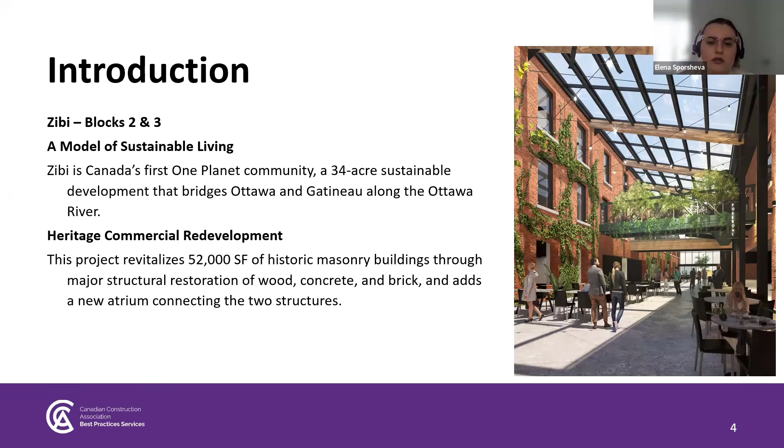Thank you, Jörgen. Thank you so much. Good afternoon, everyone. My name is Elena Sporsheva. I'm a team lead at Ledcor's Virtual Design Construction Division. Today, I'm excited to walk you through our BIM journey on Zibi Blocks 2 and 3, an award-winning adaptive reuse project that blends heritage with innovation.

Zibi is Canada's first one-planet community, spanning 34 acres across Ottawa and Gatineau. Our focus was on revitalizing 52,000 square feet of historic masonry buildings, preserving their character while integrating modern systems. We used VDC from 2018 to 2021 with a modest BIM budget of $15,000. Please note that the BIM budget does not include the cost of laser scanning or the FARO Scene license, as these resources are shared across multiple projects. Our tools include FARO Scene, Revit, 3ds Max, and Sketchfab, supported by our internal Ledcor virtual construction team.

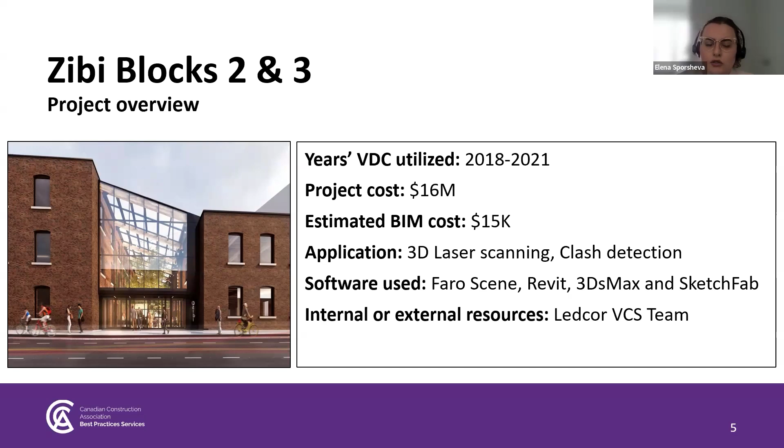Nowadays, there's a wide range of scanning technologies available, from compact handheld devices like an iPhone Pro, which can generate point clouds instantly through apps, though with limited accuracy, to high-precision professional scanners like the FARO system that we use—pictured on the left. Back in 2018, such variety didn't exist, so having these options today is a major advantage.

When we go on site, we strategically place the FARO scanner throughout the space to capture data. Like still photography, the FARO scanner records the exact conditions of a building, producing a highly accurate 3D representation. This process typically takes from a couple of hours to a few days, depending on the complexity and size of the site. This results in a point cloud, a digital 3D cloud of dots, where each dot represents a precise point in space. Together, these dots form a digital copy of the real-world environment.

We use FARO Scene software to process the raw scans. This involves cleaning up the data, registering the scans, and validating them. Registration can also take a couple of days to ensure that all scans are aligned correctly. While devices like iPhones can produce point clouds instantly, they lack the precision required for many professional applications. The choice of scanner depends on the accuracy requirements and scope of the project. Once the scan is polished, it becomes our precise starting point, replacing outdated drawings or assumptions and enabling confident decision-making based on real-world conditions. The end product scan is shown on the right.

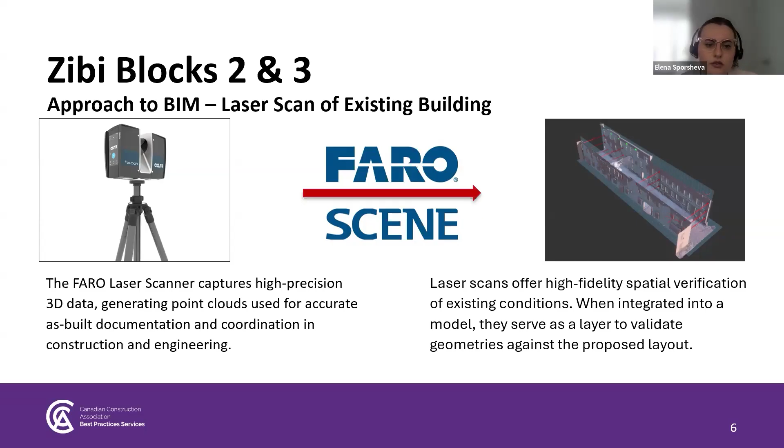Next, we either build or receive a 3D model, for example from our consultants. This model represents what's planned or designed. Now we combine the point cloud and the 3D model. In our case, we used 3ds Max, but you could use any other modeling software. This step allows us to validate whether the real world matches the design. Next, please.

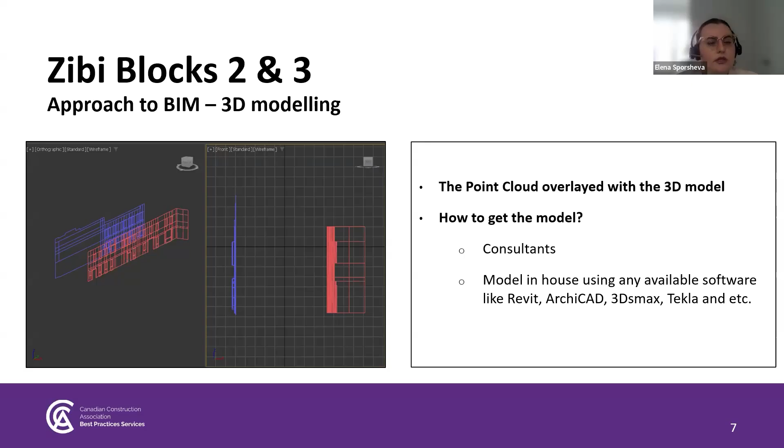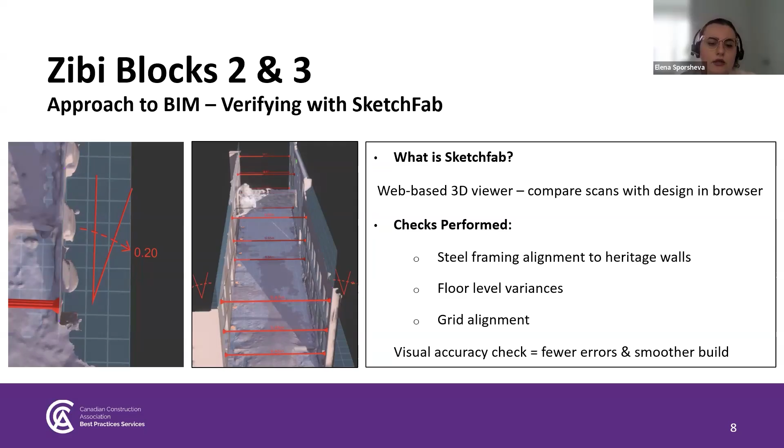Finally, we upload the combined models to Sketchfab, an online 3D viewer that lets us share and interact with complex models directly in a web browser. This process allowed us to verify steel framing alignment with the existing heritage walls, floor level differences across the building, and structural grid shifts or misalignments before construction began. Using Sketchfab gave the team an accessible visual way to validate accuracy, identify risks early, and communicate findings with all stakeholders.

Point cloud usually shows up in the colors of real-world objects or in just black and white, depending on the scanner settings and capabilities. To make things clearer, we applied color coding in our models. Scanned facades appeared in pink, while modeled steel beams and columns were highlighted in yellow and gray. This straightforward method helped everyone from engineers to project managers quickly distinguish existing elements from new ones, streamlining project coordination.

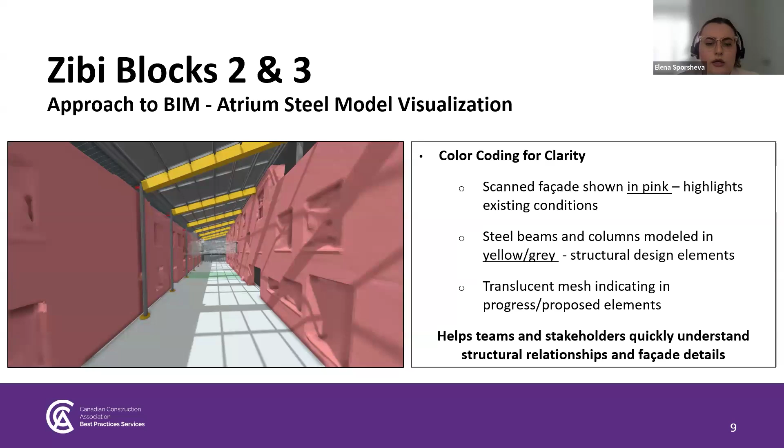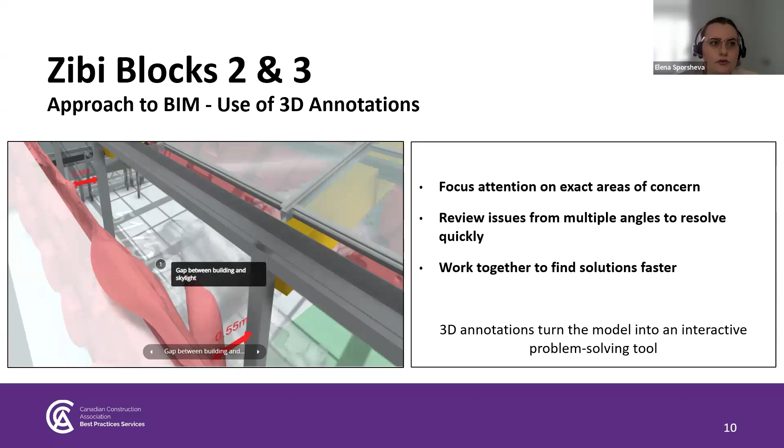Instead of marking up flat drawings, we placed comments directly onto the 3D model. This enabled team members to focus on specific areas, review details from multiple angles, and collaboratively resolve issues in context, dramatically improving problem-solving speed. For example, in this case, the comment was to draw attention to the gap between the building and a skylight that varied in different areas from 50 to 60 centimeters.

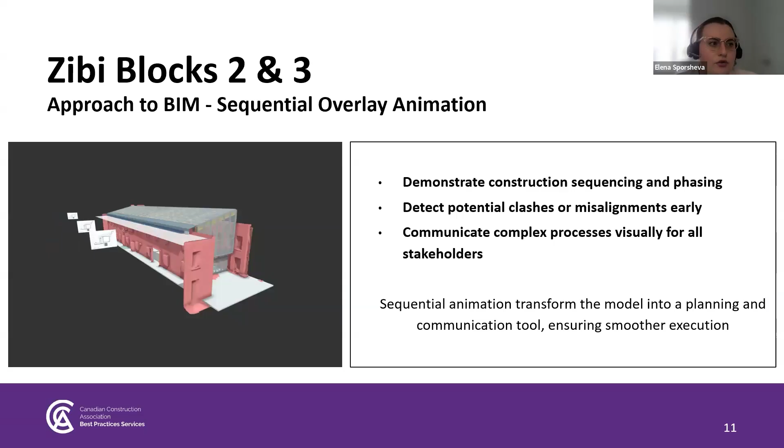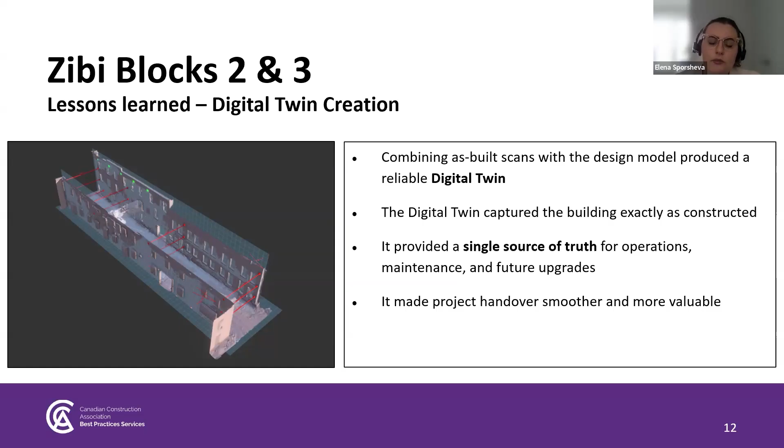One of the most important lessons from this project was the creation of a digital twin. By combining the as-built scans with the design model, we ended up with an accurate digital representation of the building exactly as it was constructed. This became a single source of truth that stakeholders can rely on. The key takeaway is that a digital twin extends beyond construction, making it a long-term asset throughout the building's lifecycle.

Another lesson we learned was how useful it is to combine 2D drawings with the 3D model. On paper, complex details like how a facade connects to the structure or how a roof is built can be hard to understand and often depend on someone's experience. By overlaying these 2D drawings directly onto the 3D model, we gave everyone the same clear visual reference. This helped us see how different systems fit together, spot gaps or mismatches between shop drawings and the model, and catch issues before anything was fabricated or built. The key takeaway is that combining 2D and 3D isn't just helpful, it's essential for complex assemblies. It removes confusion and makes coordination much more reliable.

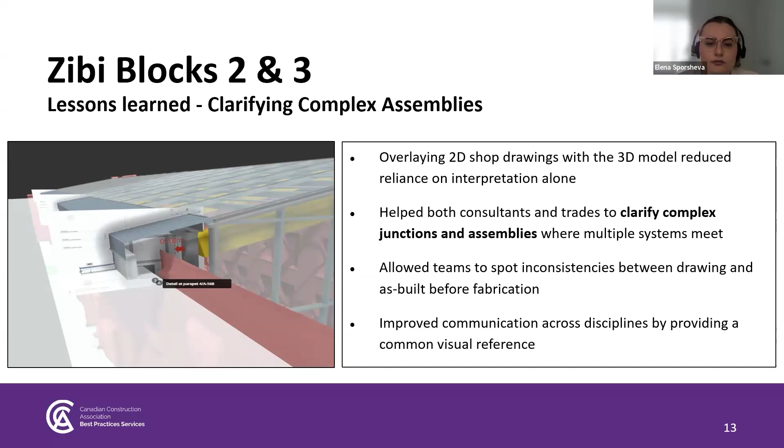This helped us check measurements directly in the 3D model and compare them with the grid system. That way, we could quickly spot if anything, like structural parts, facade details, or floor levels, was starting to shift out of place. It meant we didn't have to rely on manual checks or guesswork, and everyone had the same clear reference points. The big takeaway is that using both measurements and grid overlays makes things more accurate and helps catch problems early.

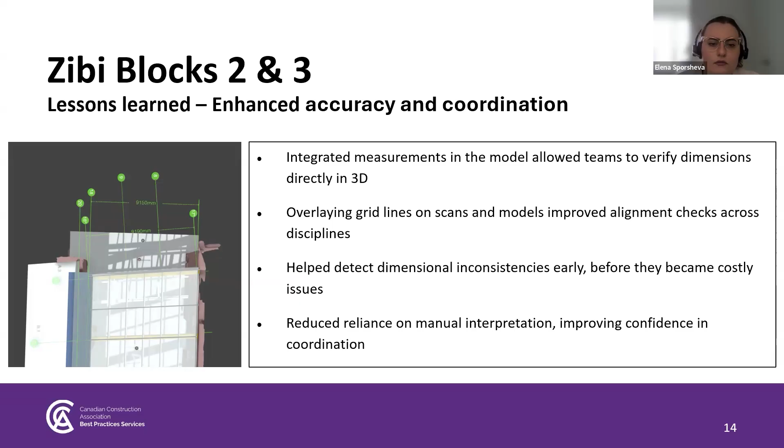By using animations and cutaway views, we could show not just what the finished space would look like, but also how each system gets installed and in what order. This made it easier for the team and stakeholders to understand the process, something that regular drawings often can't do. The 3D model also gave us a clear preview of materials and finishes, which helped reduce confusion and make sure everyone was on the same page before construction started.

One important thing we learned was that we often had to adjust shop drawings to match the real site conditions captured by the scan. This helped make sure everything would fit properly during fabrication. The main takeaway is that using model-based visuals helps connect design to real-world execution. It clears up confusion and makes coordination much smoother.

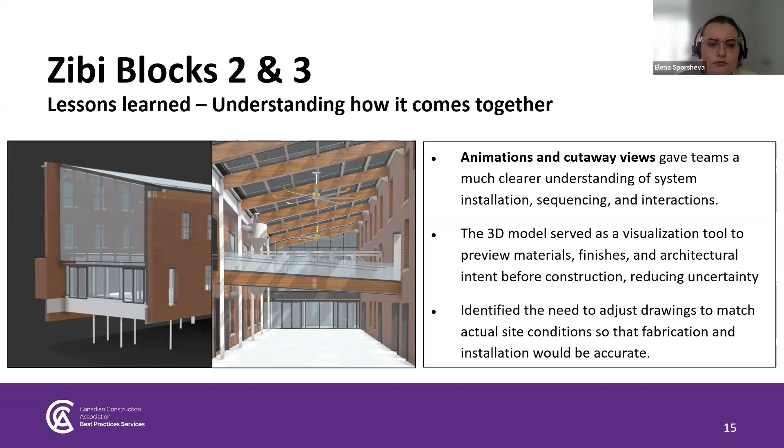To conclude, this project showed us that laser scanning and 3D point clouds are powerful tools that bring real value across the lifecycle of a building. They reduce errors by capturing existing conditions precisely, improve collaboration by overlaying scans with models, and make communication clearer with color coding, annotations, and animations.

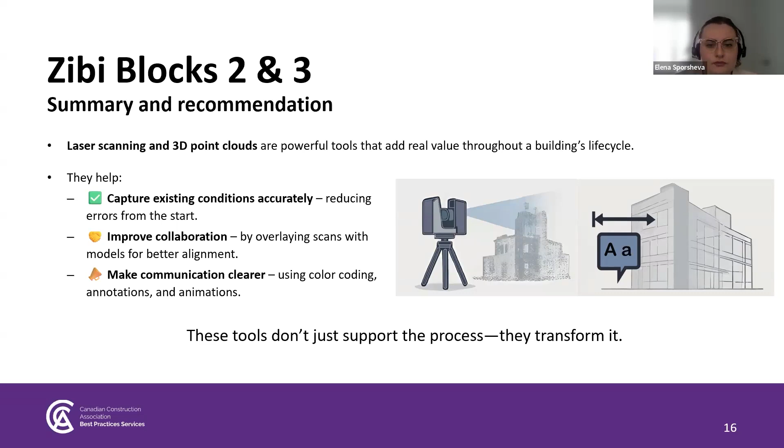For small businesses, the recommendation is to start simple. Use scanning on projects where accuracy is critical. Bring the scans into a model and share that with your team and clients through easy-to-use platforms. Depending on your budget and precision needs, you can choose from a variety of laser scanning tools like a smartphone-based app such as SiteScape on iPhones or iPads Pro, which offer a low-cost entry point for quick scans, or handheld devices that provide a balance between mobility and accuracy, ideal for medium detail work. Then there's professional grade terrestrial laser scanning, which delivers high precision and range and is suitable for complex or large-scale environments.

Over time, these tools can become part of your standard workflow, improving not just construction accuracy, but also long-term facility management.

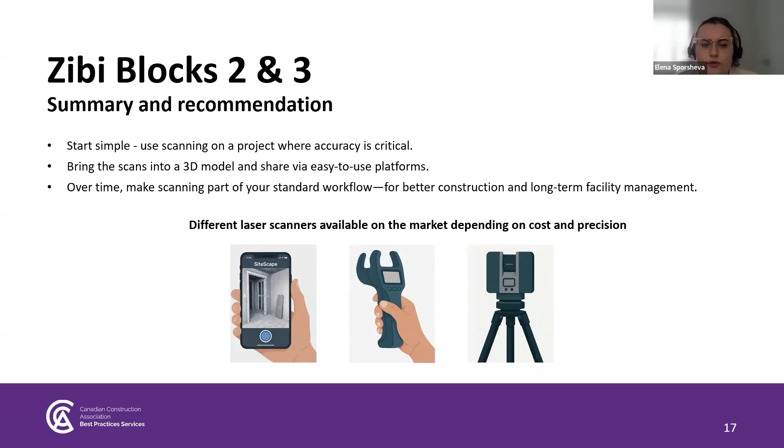The key takeaway is that reality capture and 3D modeling aren't just advanced tools for big players. They're accessible, practical, and can give small businesses a competitive edge.

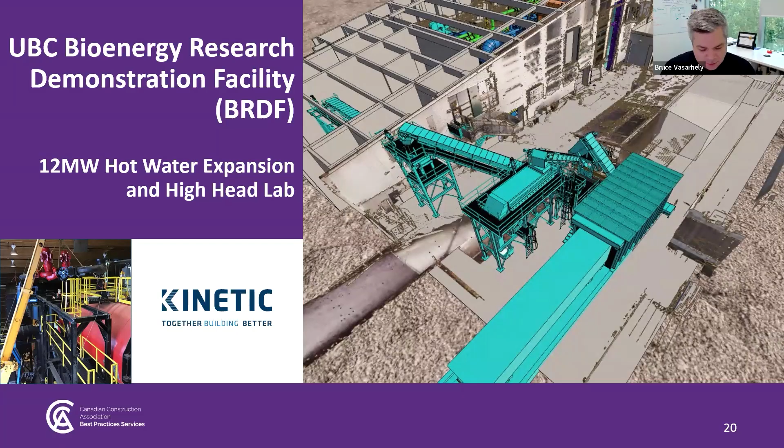We started in pre-construction on this project with them in January 2019 and ultimately finished construction in May of 2022. Next slide, please.

So from the outset, or maybe an overview of this project, in 2019 dollars, it was a $12.4 million project. I'm not sure what it is in today's dollars. I think there are some more zeros that would be added on.

At a summary level, our costs for BIM were in the order of $40,000. And again, that was including the cost of scanning.

Following along with what Elena talked about, a large part of what we did here involved point cloud scanning, laser scanning. Our application was the notion that we're going to be bringing all of this new equipment into an existing building and an existing operating industrial facility, and needing to understand that things would work and how would they fit.

The software utilized, similar to what Elena talked about, we used Faro Scene. On the BIM side, we used CATIA, as well as Revit and Tekla, among others. In this case, we used an external BIM consultant. Maybe next page, please.

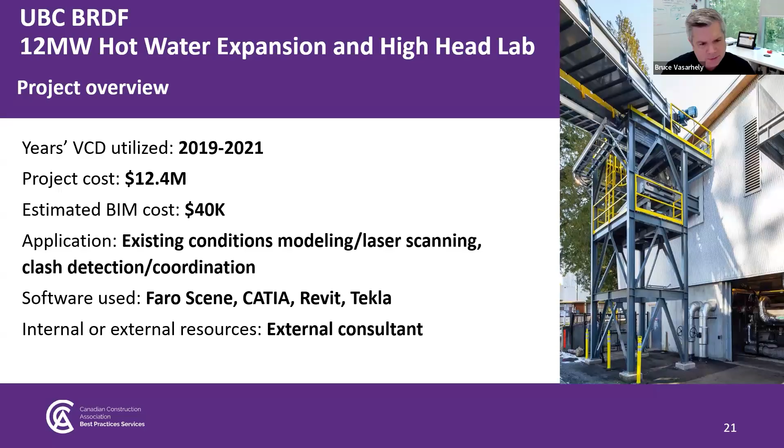So for this project, we had an existing facility that was 16,000 square feet, roughly 100 by 160 by 45 feet high. It had an existing 6 megawatt boiler that currently operated, that had to continue to be operated throughout the heating season. We were going to be introducing a new 12 megawatt wood-fired boiler into that building.

The building was mass timber construction with glulam beams and columns, CLT roof and wall diaphragm, no interior columns, so all exterior supported. Among the challenges were that we could not, without major disruption, remove one of the existing perimeter columns or affect the existing structure, and yet we had these large components and pieces to go into the building. As well, we had a lot of large industrial equipment to be removed.

We had installation of large scale equipment. We spanned over COVID-19, which presented its own challenges for sourcing of materials. We had large equipment being fabricated throughout North America, Quebec, and into the US - conveyors, boilers, etc. Some of this equipment was extremely heavy, 100,000 pounds plus, and we had limited space to work within in an operating plant.

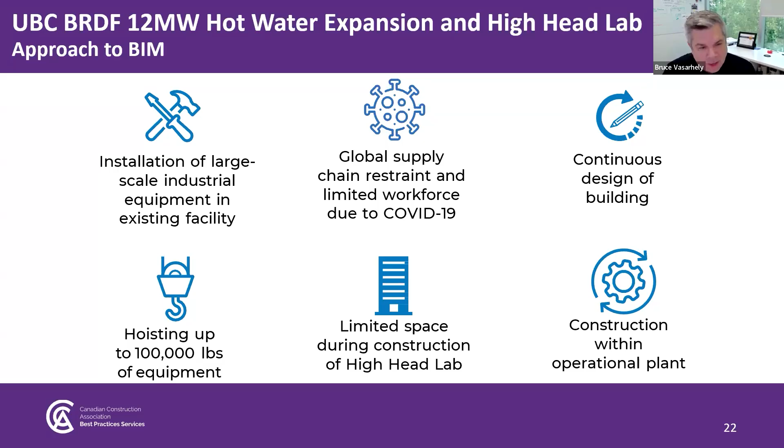And yes, these images as we go are from the project. You'll notice in the background we utilize the point cloud scan, and then by importing the Revit models that were manufacturer-level models from the manufacturers of the various equipment, as well as the Tekla model from the structural contractors, we were then able to undertake clash detection using both virtual models and animations, because as we were involved in this project, our ideas expanded.

We went from, does this thing fit? Now that we're in this, and not being BIM experts but being project manager, superintendent, project coordinator, now that we have this tool, can it do these other things for us as well? So it was a bit of a journey of exploration of, now that we have it, what more can it do for us?

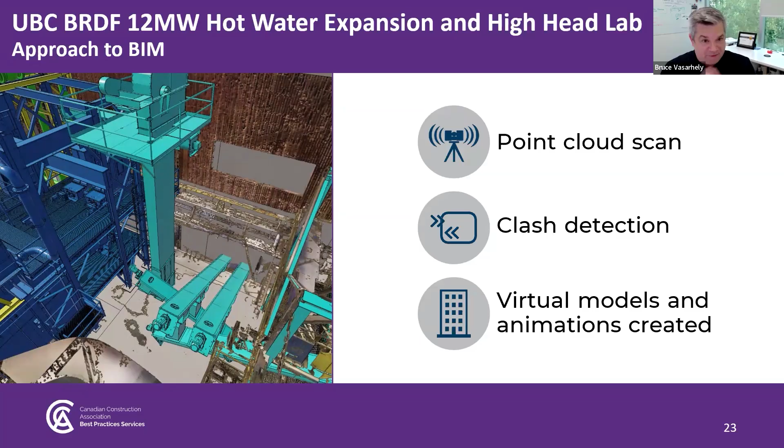I think the turning point in this project, we talked early to the client about, we felt that modeling and scanning was going to be important to the project, and we wanted to see if we could introduce that into the project. It wasn't something factored into the plan or the budget, and at the time the client understood it sounded great, but it was going to be a hard sell getting support for additional funding for this. So we undertook this anyway ourselves.

This was one of the prime examples we were able to bring forward, which showed there was a structural modification we needed to get the new equipment into the building. But that structural modification was going to leave behind the components you see on screen, and those we were able to show were going to clash with all of the boiler equipment we were going to be bringing in. So the very things that caused those structural elements to be needed in the first place were going to be in conflict with the boiler.

We were able to indicate that in the model, then establish minor tweaks to make it work. This was something that, in a practical sense, 45 feet in the air, we would not have been able to visualize with enough precision, and it would have cost the project a lot of time and money as a result.

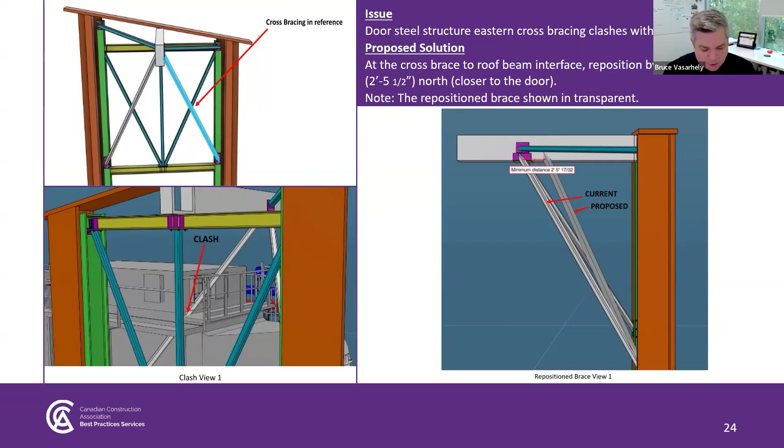So with a couple of these examples, the client quickly learned that this was going to be a real benefit, and then came around to seeing the benefit and entertaining the idea of participating in the cost. Ultimately we wound up splitting the costs one-third, one-third, one-third between ourselves, the major subcontractor, and the client. Again, quite cost effective.

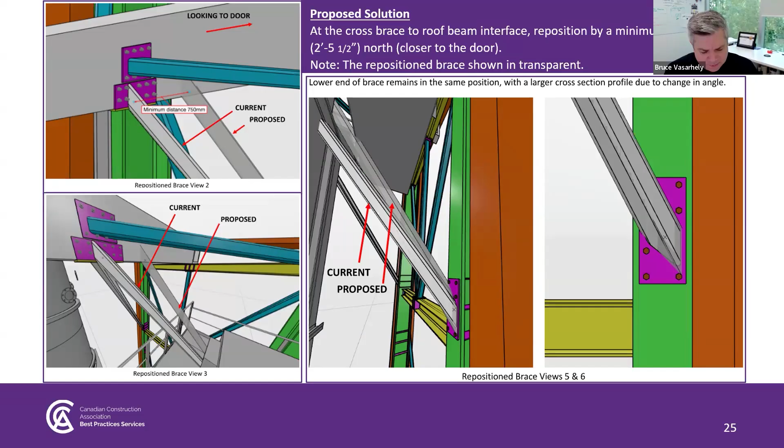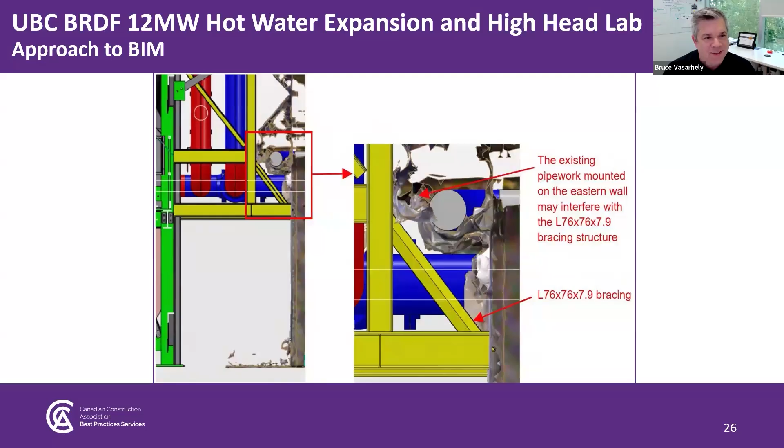We utilized this not only for clash detection of structural elements, because we had done widespread point cloud scanning of all the existing facilities. We were also able to indicate at the outer perimeters of all this new equipment and at the edges of the newly demolished equipment, where in this case piping was going to be in conflict with new pipe rack elements and new piping elements. Again, this really allowed us to evaluate how we were going to get this complex machine built inside an existing facility that already had a complex machine that couldn't be interrupted.

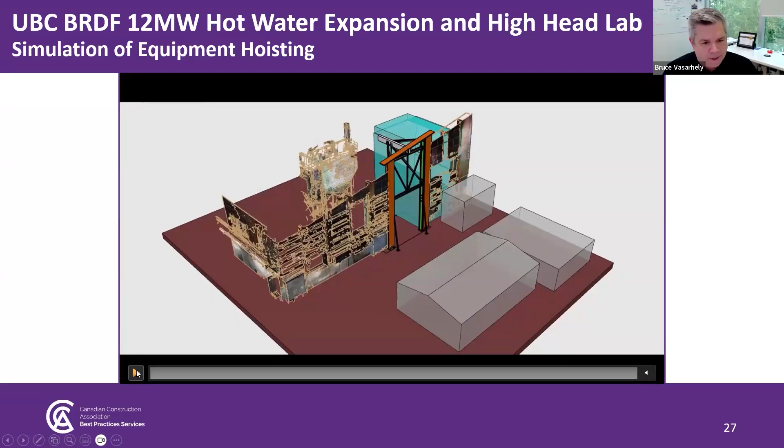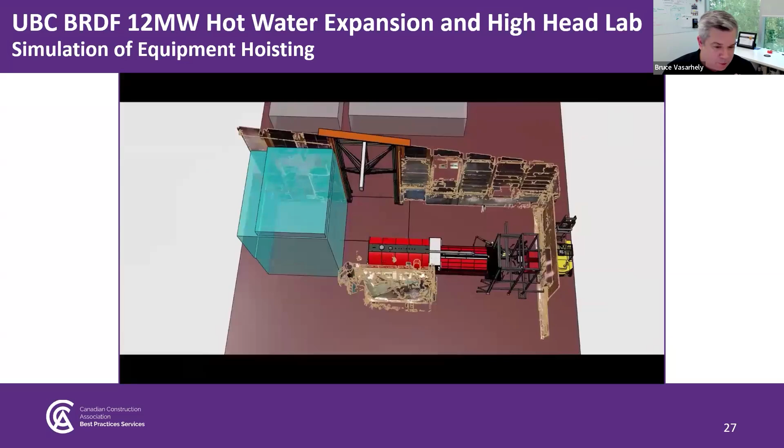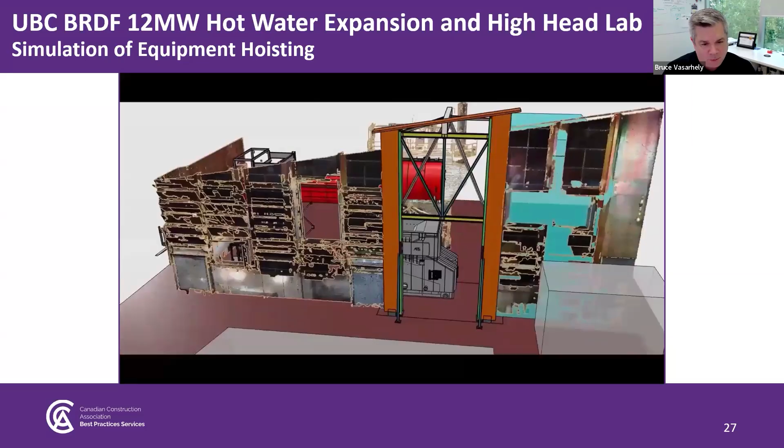At a high level here, we're not showing the trucks and cranes, we're utilizing the information we've got for hoisting, then zooming in to see if we can actually fit this equipment in, and whether we need multiple cranes to elevate it. But for the purpose of the model, we removed the hoisting equipment and simply showed the boiler equipment itself.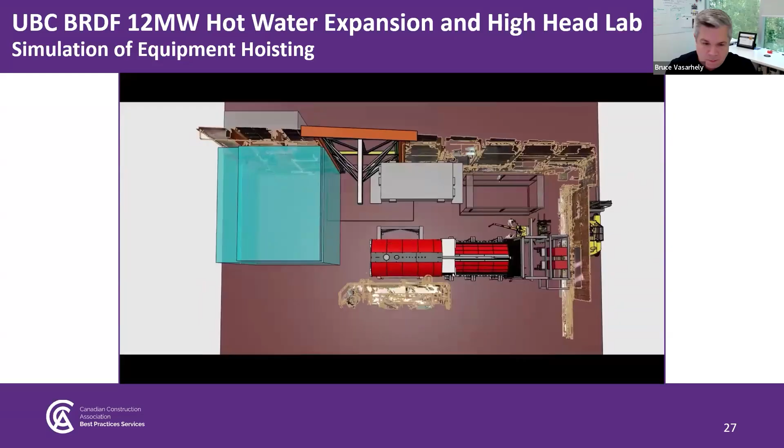In addition to point cloud scan and importing models from the manufacturers, we also utilized massing, which is what you see in the cube and blue on the left, to represent the future high head lab that we're going to be building inside of there. As we went along, our understanding and exploration of what was going to be effective really grew.

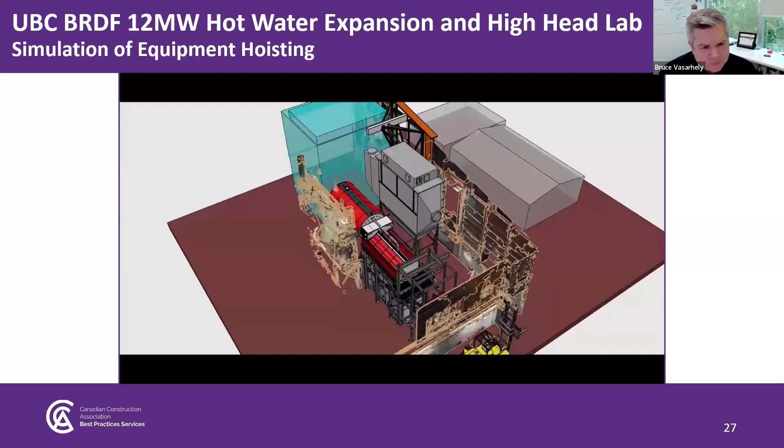As we continued to understand, we looked at the existing structure. We were able to scan and overlay drawings and models. Drawings represented a door in the location you see highlighted in yellow. Scan shows where the true location of the door is. And the model is showing us where these new auger conveyors need to be. It really allowed us to dive into how we're going to build this machine.

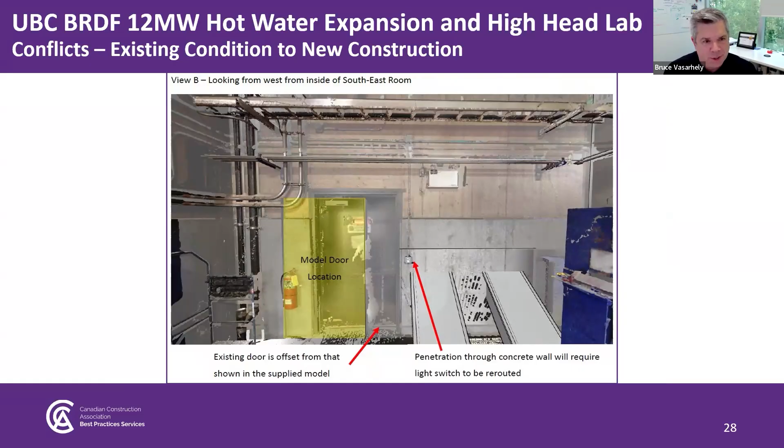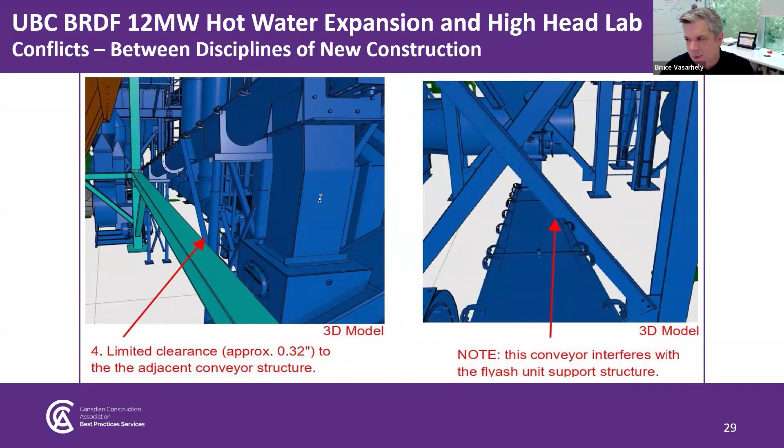In addition, it really allowed us to coordinate within the various models coming forward between the conveyor suppliers and what their model looked like, and the structural steel contractor in this case, and find those clashes as well. We were just continuing to expand our understanding and use at that time.

Maybe lessons learned, and in summary, from our perspective, be open to unanticipated benefits. In our case, we came in as neophytes here. We knew we had an initial problem that we wanted to solve, but we were open to finding what else we can use this tool for now that we have it available to us.

I think the other thing was, don't be intimidated by the technology. Our approach was, we have a problem that we need to solve. We know what we would do in the analog world. So is there a digital tool that can allow us to solve the same problem, not getting caught up in the jargon or the clicks of the mouse and those things.

And then the other one was, be mindful of using technology, not using technology just for the sake of technology. So we're open-minded, we're finding creative ways, we want to use this tool, but not going down the rabbit hole of, well, now we have this fancy tool, so it would be cool to illustrate everything. I would think those were three of our key takeaways.

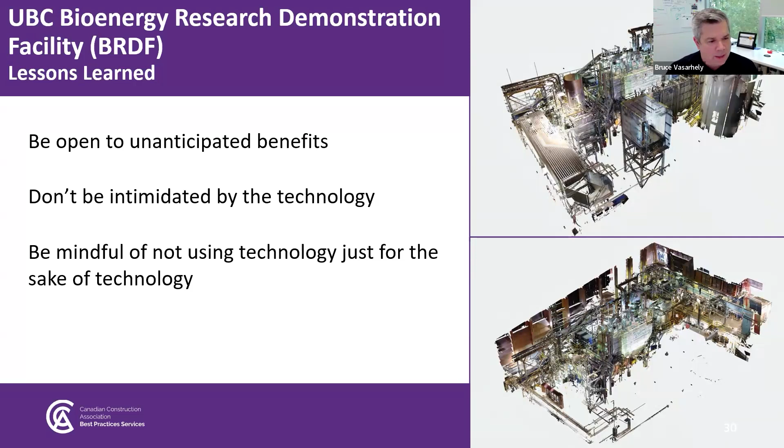In summary and recommendations, I would say don't be limited by your initial vision, and look broadly at how you can utilize the tool. Lastly, restating, don't be intimidated by the technology. If we view it as a tool and not something bigger than it is, we're able to then look at ways to utilize that tool.

Thank you, Bruce, for those excellent insights, and for sharing the whole journey with us. That video really took us on board. To round out our case study segment, we'll now turn to Jacob, who will present the final case. Jacob's work addresses how to handle installation accuracy, and it's a great example of the many benefits of BIM. So over to you, Jacob.

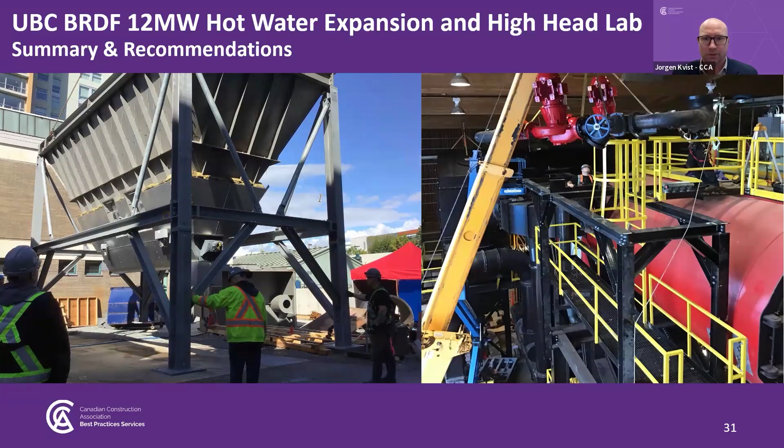Yep, thanks, Jorgen. You guys can hear me okay? Great. Okay, so if you can just go to the first slide, please, Jorgen.

Thank you. So this example for this project, this is a downtown office tower, 40-year-old office tower. One of the challenges with this project was, when this building was constructed, the design intent was for this to be purely office space. There was cast in place concrete, and there was about 40 years of changes that had not been documented in this building.

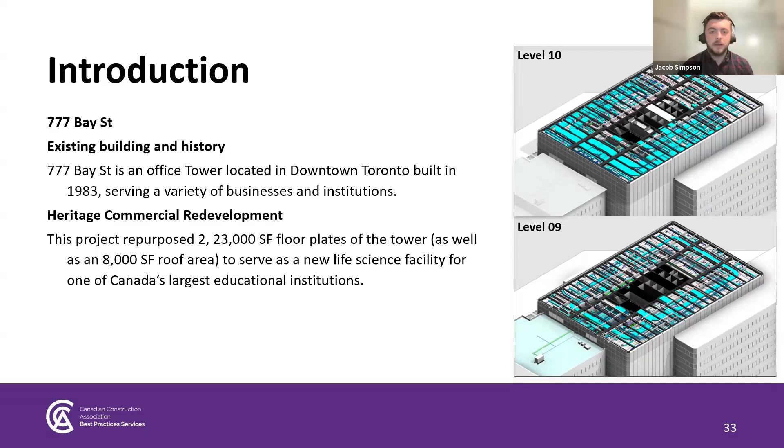This was being renovated into a life sciences building for one of the universities in the GTA. There were several areas of the project also maintaining existing MEP systems which had to be factored in. There were as-built drawings for this project, most of which the team quickly found out were not accurate enough to use for coordination. So if you could just skip to the next slide, please, Jorgen.

This project's value was around 22 million total, that's after all changes that occurred during the project. We kicked this off in 2021. This was the first example where we actually tested out using augmented reality. You can see the estimated cost for this, and the augmented reality platform that we used was Trimble.

The beauty with augmented reality is there are essentially zero hardware costs with this technology. And I think most people who are on this call can probably admit to spending too much time on their phone and being pretty comfortable using their phones for the most part.

90% of the time that you would spend on this platform is actually in a smartphone, using an app. One of the great things about this platform is it's very user-friendly, most people would be comfortable with it, and it requires pretty minimal levels of learning and onboarding.

Similar to Elena's presentation, this technology provides similar end uses. However, the caveat with this technology is you are not going to achieve that same level of precision as with a scanner. This tool is really most helpful for getting an idea of the accuracy of the design against the actual conditions and highlighting blatant issues, such as when a MEP system is clearly following a different path to what the team predicted.

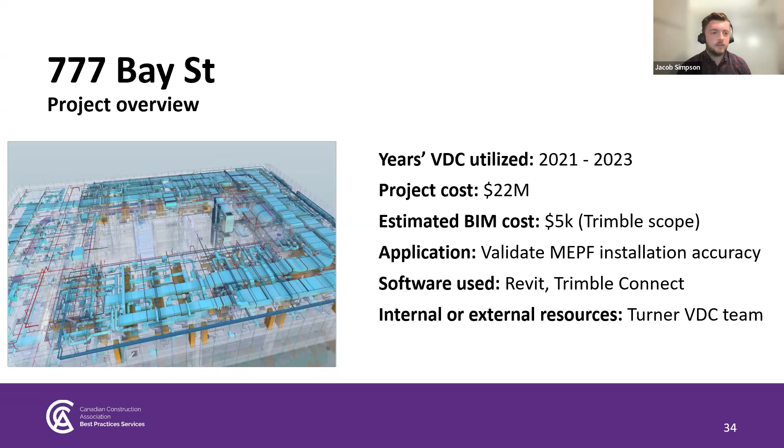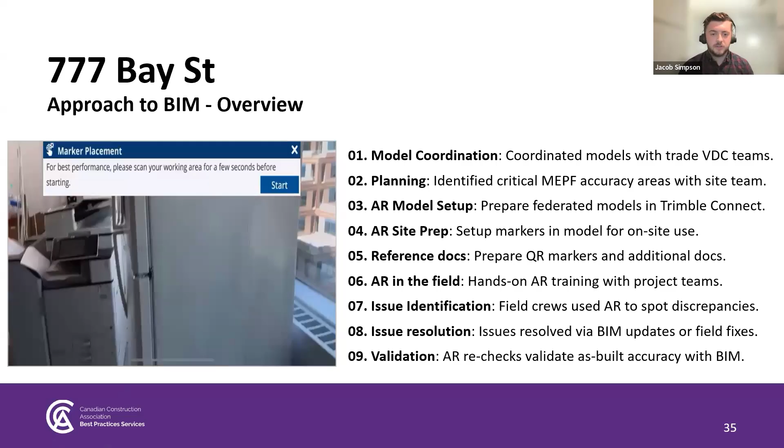So this is the approach and process required from start to end to carry out this work. This video is just showing the end result of the process and how quick and easy it is to use. This was taken on an iPhone, but it can also be taken on any tablet, iOS, Android, or the equivalent.

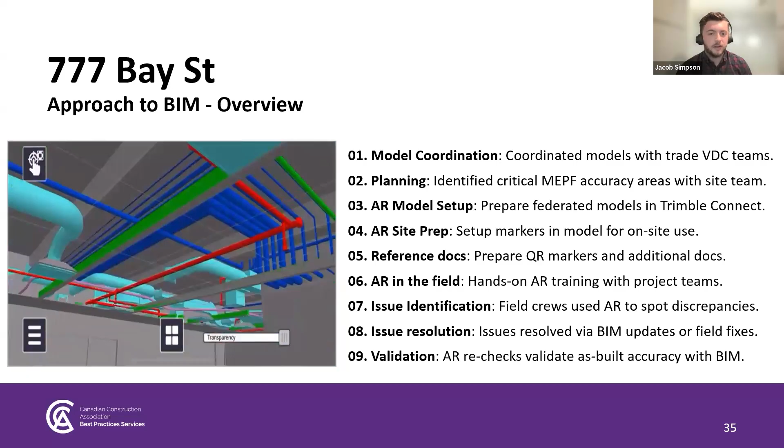So if you could just go to the next slide, Jürgen, I'll kick off with the first stage. This example shows the coordination that occurred between the ductwork and the structural ceiling grid system in one of the more congested areas of the project. This is just one example of the coordination work that happened on this project.

For augmented reality uses, it's really not limited to just MEP verification and validation. This can be used for architectural finishes, confirming door locations, checking casework is installed in the right areas, fixtures set at the correct height, things like that. It really has a wide range of applications.

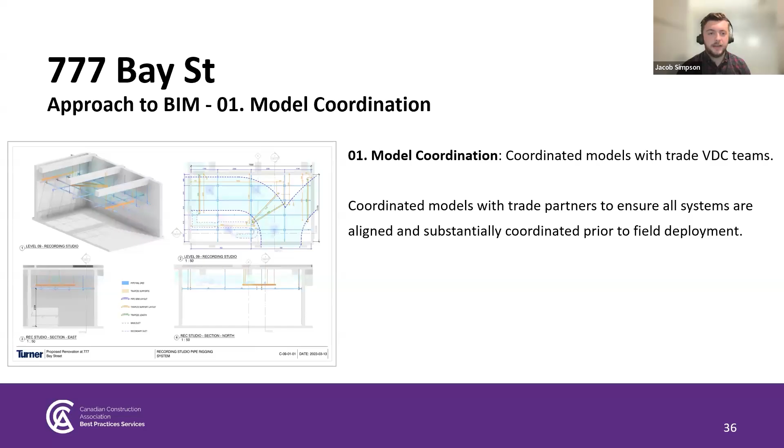But essentially, the first stage is to get your models to a point where you believe they are accurate to the conditions they're going to be installed on site. And that takes us to stage 2.

Following the completion of coordination, up until just before AR is going to take place, what you really want to do is determine which areas are going to require most attention. Obviously those are areas like mechanical rooms, electrical rooms, sprinkler rooms, where you typically have a lot of congestion and complicated systems, and you don't have as much room for deviations on site as you would in, say, an office with just a couple of light fixtures and a diffuser, where if somebody's an inch or two off it probably isn't going to be the end of the world.

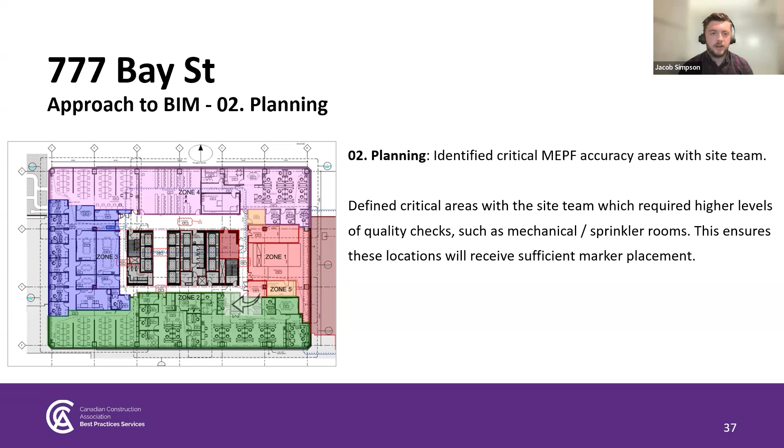You can see here how this plan of one of the floor plates has been zoned out, really highlighting which zones have more congested areas and where we'd need to spend more time and attention when using the platform. That would take us to stage 3.

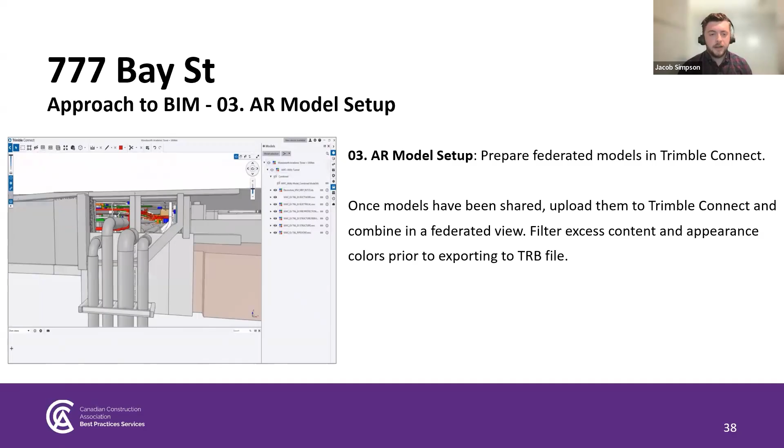Thank you, Jürgen. So this is just showing the process, and again, this is accessed through a web platform—there is no special software or high-powered machine needed to use this tool. This video shows all of the different systems of the project being loaded in. Each system is identified with a color, whether that's an existing system or a new proposed service, preparing that model for use in an overlaid condition in the real world.

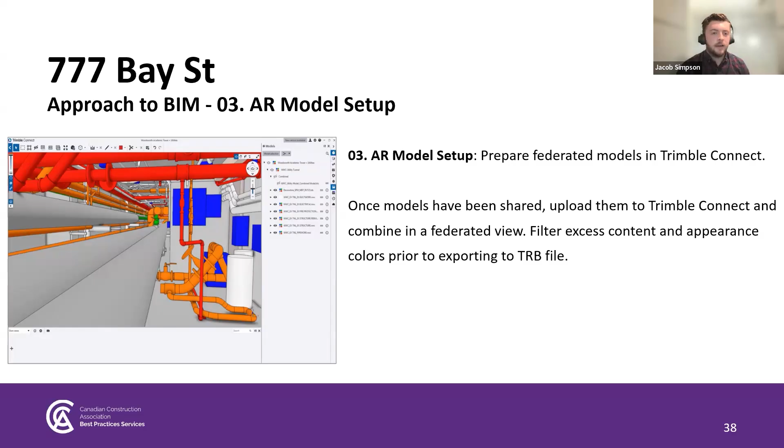These systems can be trimmed down to certain rooms. On smaller projects where there are really only one or two locations where the tool is valuable, these views can be trimmed to just a certain location, like a mechanical room or pump room—that's absolutely possible. To be honest, the smaller the area of the model, the better it will run. The more model content you have, the more likely it is to experience some lag or issues, but on most projects that won't happen.

So after that has been combined, the last stage before this is overlaid in the real world, where you can really see the differences on site, is to set up the markers inside the model.

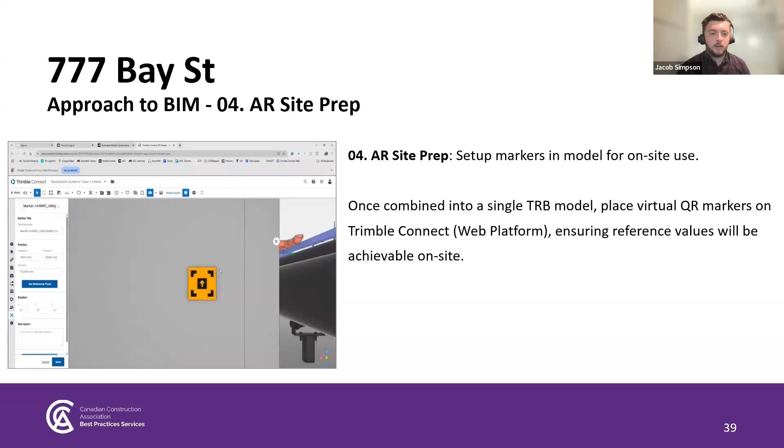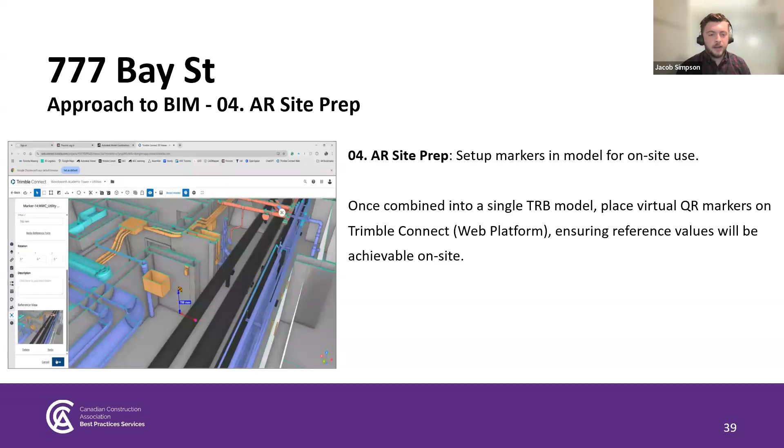This shows the quick process for placing a marker, similar to the previous view but using a different tool on the web-based application. When you place markers, you want to reference locations you have high confidence in, like concrete columns, walls, and existing conditions that won't change. That said, you can choose anything that isn't going to be moved anytime soon. Once set up, you get a QR marker where you can enter information like room location and add imagery to help people identify that spot on site.

A lot of the time when working on these projects, there's a lot going on—people moving material, things getting hit. If markers do get removed, we've found value in creating a quick one-pager showing the marker number, the room, and the location, with the QR markers all printed off. This would be shared with teams so if they ever needed to replace markers on site, they could easily refer to this one-pager.

It's a little hard to read in the image, but most of these markers have a consistent height of 1.5 meters above floor level, since that tends to be a more comfortable elevation for placing them on a wall. They're also given round numbers—like 0.5 meter or 1 meter away from a wall—so it's an easy value for someone to measure rather than a randomized one.

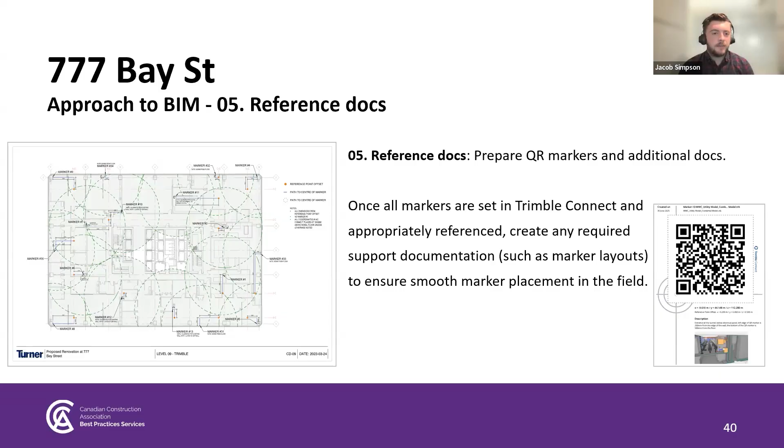Next slide. This next video is taken on an iPhone—you can see here when this starts playing.

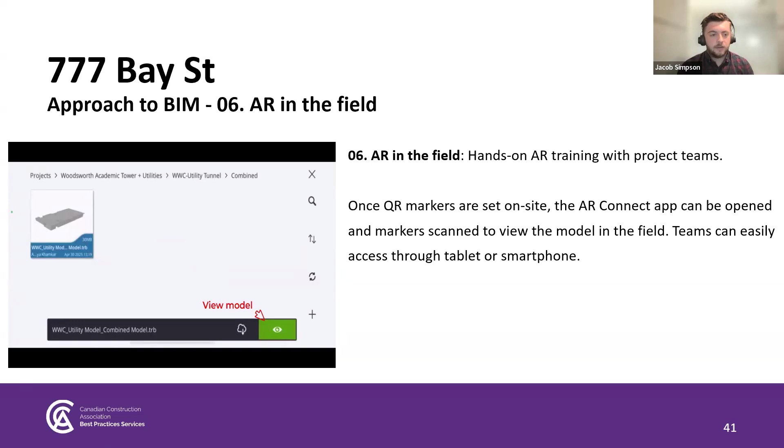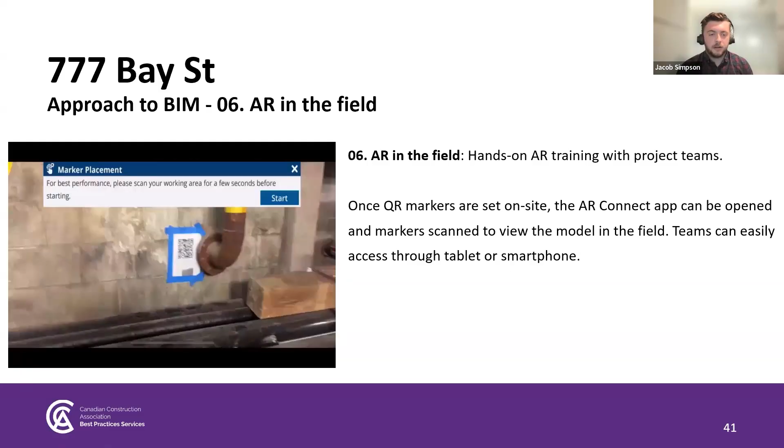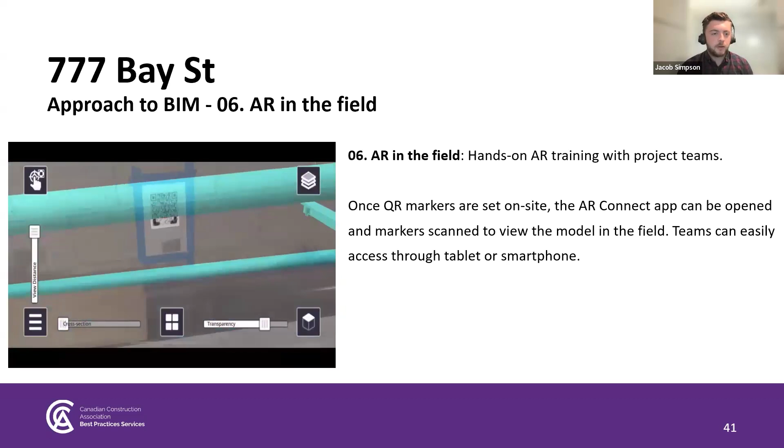This is all taken on the Trimble Connect app. Once you navigate to the combined view for whatever area you want to see, the model loads up almost instantly on site on your phone. This is a fairly dense model—a civil service tunnel with a lot of MEP content. After selecting place marker, you point your camera at that spot and move it around a few times. Depending on lighting levels it can take a few tries, but it quickly loads the model and instantly aligns it to the real world.

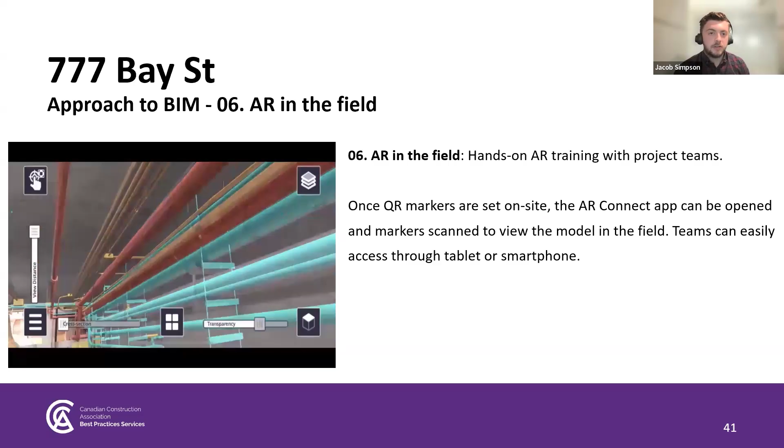You can verify alignment by fading the model in and out to get a quick sense of how well it matches, and check for anything glaringly obvious that's been missed. In this case, we found there were a lot of existing pipes that had been demolished that the designers didn't realize, so we were able to identify that pretty quickly.

There are basic tools in this platform where you can take a quick dimension here or there. It's not going to give the same precision as a laser scanner, but it gives a pretty good picture of whether people are following the design, or if the real existing conditions don't reflect what the designers accounted for.

In a lot of cases when we've done this, we've found beams, floors, or existing ceiling spaces that were lower or in completely different locations than expected. It's only after quickly checking that with this system that we can send them a picture and let them know.

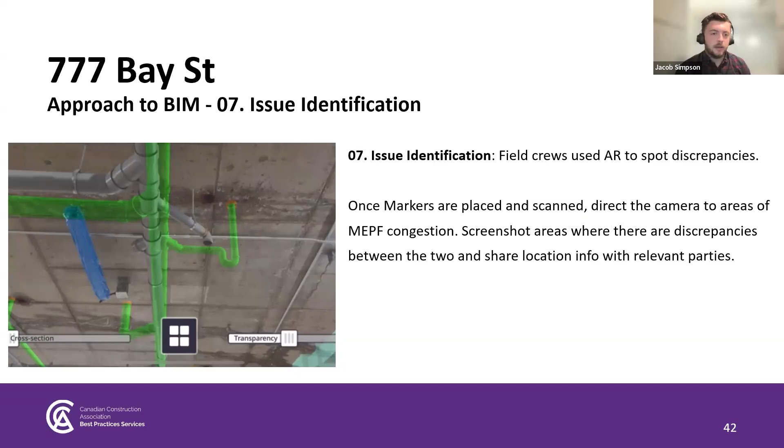And then more accurate dimensions can be taken on site if those are required.

That takes us to the resolution stage. After issues are identified, depending on the type of condition and how easy it is to fix, if it's a structural issue that really can't change on site, that would be updated in the models to reflect actual conditions, and systems adjusted to avoid interferences. Or if there's a slight deviation in an existing duct, that would just be corrected in the model as well.

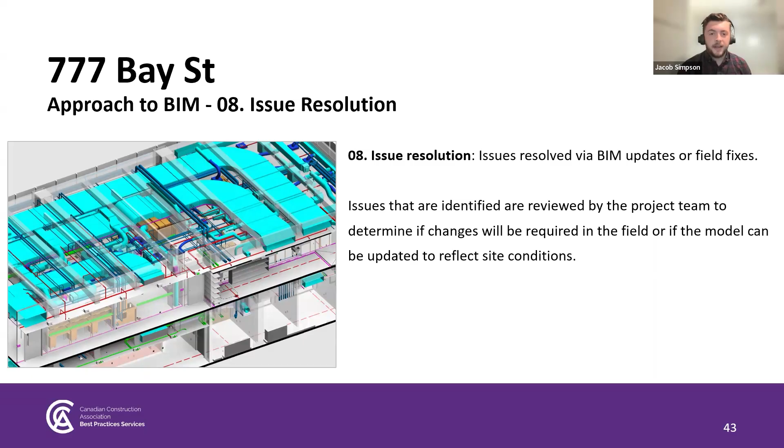Following that process for all areas, that takes us to the validation stage, doing another round of the project after corrections have been made. If you play that, Jürgen, it should show what you'd expect to see with a decently aligned model. It's not millimeter accuracy, but it paints a good picture of the alignment between the model and the real world.

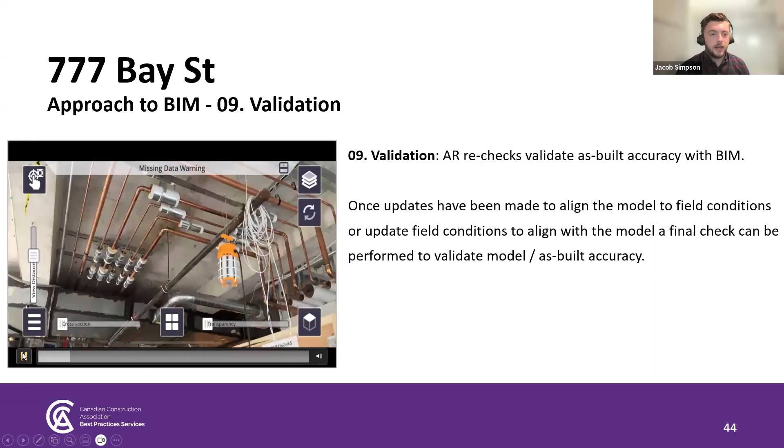That takes us to lessons learned. There are a few lessons learned and recommendations I'd suggest. For a lot of projects, there's only one or two systems that really need to be checked, depending on their criticality. Keeping the model simple and avoiding over-congesting it with detailed pipe fittings, valves, and especially structural designs with individual bolts and such, a lot of the time those will slow things down, so those things can be filtered out quickly.

The other caveat to this platform is there's a limited range to what can be viewed. You can't scan a marker and view 20 meters away; you need a marker located in your vicinity. That's because markers are never going to be placed at the exact 0-degree angle on all X, Y, Z axes. Even a 0.1 degree difference means the further away you look, the more it will deviate, essentially because marker placement can never be as accurate as model placement.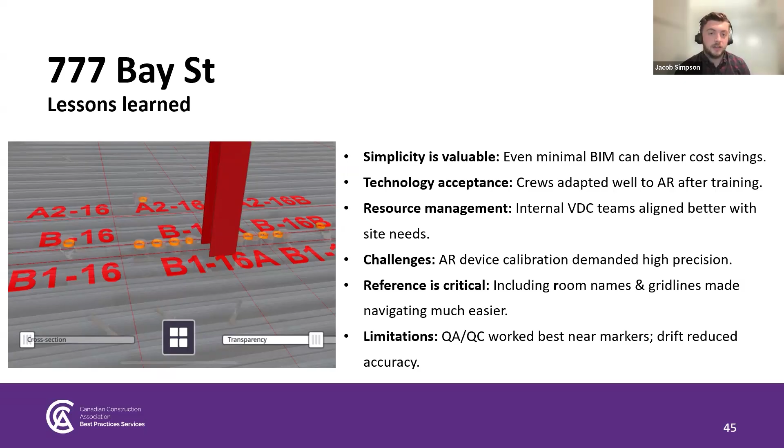Thanks, Jürgen. The best recommendation would be to target small areas where challenges are expected — heavily congested rooms, areas with bespoke designs, or uncertain existing conditions or outdated shop drawings or as-built drawings. Those areas would definitely be worth checking.

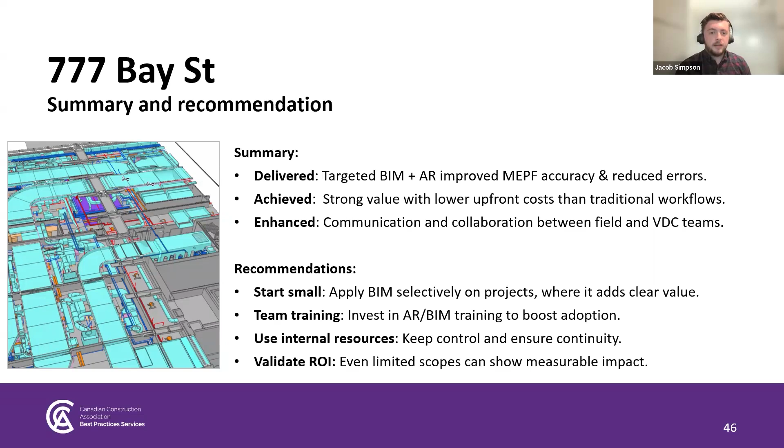It does help bridge the gap between a BIM coordinator team and a site team. The main benefit is that no hardware is required, and it's a very low cost license — a few hundred dollars, I believe, depending on location, for a year. That doesn't limit you to a specific project; anyone can sign in and access it for a specific project if needed, or multiple projects. Unless anyone has questions, those are my main takeaways. Thank you.